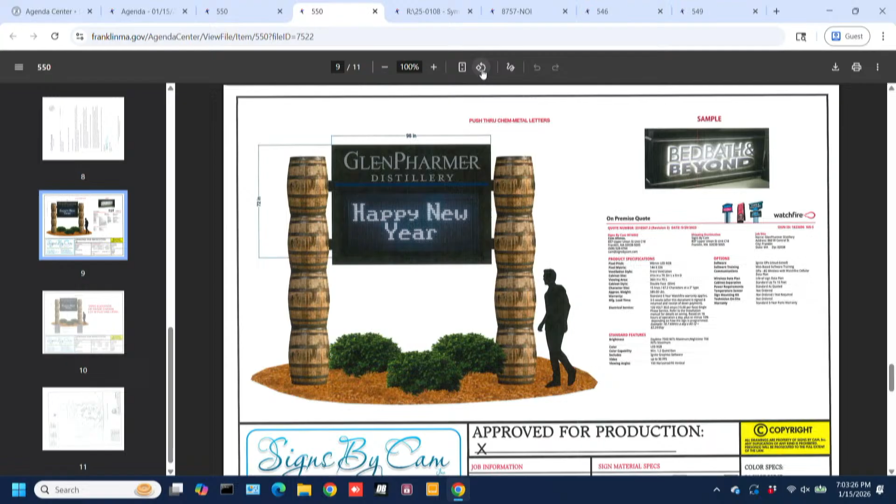Well, that's impressive. So basically, we're using 8 of our whiskey barrels as signposts. There's actually steel behind it. So the idea is, what we'd be disturbing would be digging footings. The footings would be dug so that the posts, which are inside the barrels, would be embedded in concrete. And ultimately you can see the steel that comes out and attaches to the frame in the center of the sign.

So you're not moving it any closer to the brook, just up the road relatively speaking? It might be slightly - the angle of the brook is such that... I don't know that it's exactly the same distance, but it's probably comparable based on the angle. Digging a round hole, put some sonotube in it, putting the thing in and filling it full of concrete. Correct. Yep, okay, pretty straightforward.

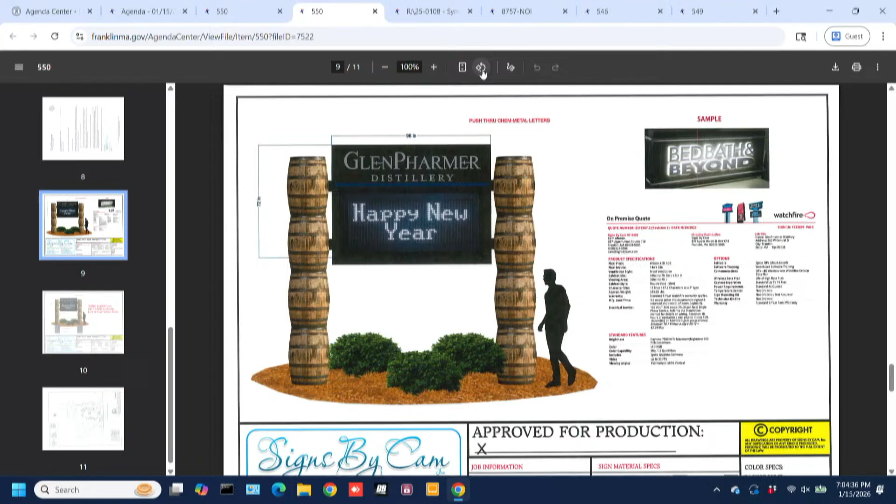Breeka Li, any comments? Only that this is very de minimis in nature, so I would recommend an approval. Agreed. Any questions or comments from the studio audience?

All right, with that, Richard, you want to give us a motion to approve the MBZA for 860 West Central Street? Love to. I give you a motion to approve the MBZA for 860 West Central Street. Second. All right, vote to approve. Approve. Approve. Approve.

Thanks for coming and taking the time to explain it to us, we really appreciate it. That didn't hurt too much. No, it didn't. It's been a process. Thank you so much. Yeah, no worries.

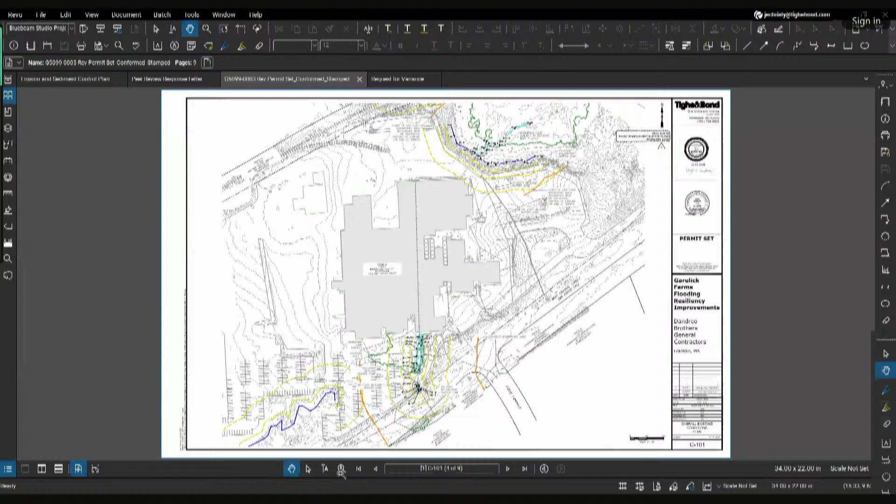Louis, any comments on the PLS? So the information you obtained was from the referenced drawings or surveys. I'm seeing here, let's see, the most recent one was the resource areas—well, that was done by you guys. But then there was a utility. I'm sorry, what are you looking at? The G002 general notes, the base plan notes. So really, you took the information from the utility that did the underground surveying, and that included the most up-to-date survey information on this plan?

So this list is all the pieces and parts we've used. Garlick Farms had their own base plan. We did the topography—Tighe and Bond flew the topography. Outside of the resource area delineation, we did have WSP, the surveyor, do a survey of the drainage system, that's the third bullet. After that, we did ground penetrating radar to find other utilities in the area, the depths and things like that. And then we referenced the drainage infrastructure project in West Central Street that was done for DOT, to make sure some of our property line information was correct, so we had their layout and property line information shown accurately on the drawings.

Nothing's changed since this information was generated that you guys used. Not to my knowledge, no. Okay. No.

Yeah, I think typically when we work on the application itself, it does request the PLS to have that information presented to us. I know there's some cases, especially as an engineer, you can do that. You just reference other pieces of information as long as it hasn't changed, or you're working in conjunction with a surveyor. There's those types of situations.

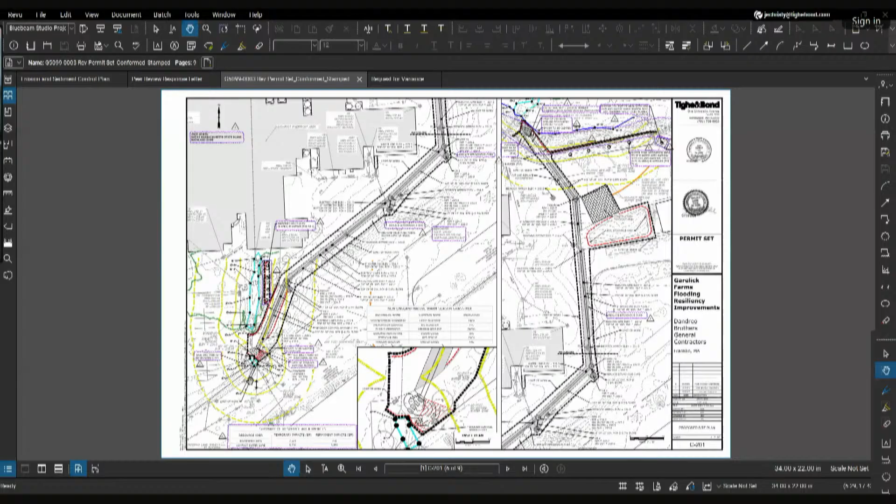And I know there's not a lot of information in here already, but it's... this is a very developed site. They've been here for years. They know where everything is. Yeah, we're putting in a drain line to go and suggest, and they've detailed exactly where, 1, 2, 3, 4, 5, 6, 7 pieces of information where they got the layout. What are we going to achieve by doing something else? I don't understand. Yeah, I think they know exactly where it's going to go and what they're going to be crossing. No, I don't doubt that, so.

No, just looking at the plan, like the references now, it seems like you have a lot of them in there. Right.

Louis, out of curiosity, does it make a difference to you on the precedent that, in this case, we are not actually building anything? Right, so they're not putting up new buildings, they're not putting up new structures. Right, yeah. And in that case, I would agree that I think the PLS is probably far more important, because you need to know exactly where it is on the property. Yeah, but in this case, they're digging a trench. I think you're right. Yeah. And I don't know if that alleviates some of your concern over the precedent.

No, that's definitely a good comment, for sure. I think, just given that there's information in there and they're referencing it, and nothing's changed since the last information, so is that my understanding? Is it, Gene? That's my understanding as well. Okay, all right. Okay.

Any other thoughts on the variance for the PLS? You feel comfortable, you got more knowledge than... It's interesting because we'll use it oftentimes, at least in some of the projects, especially when it's more complex, we'll use a survey. Like I said, sometimes if we have enough information, we can put it down. But basically we're certifying that this is.

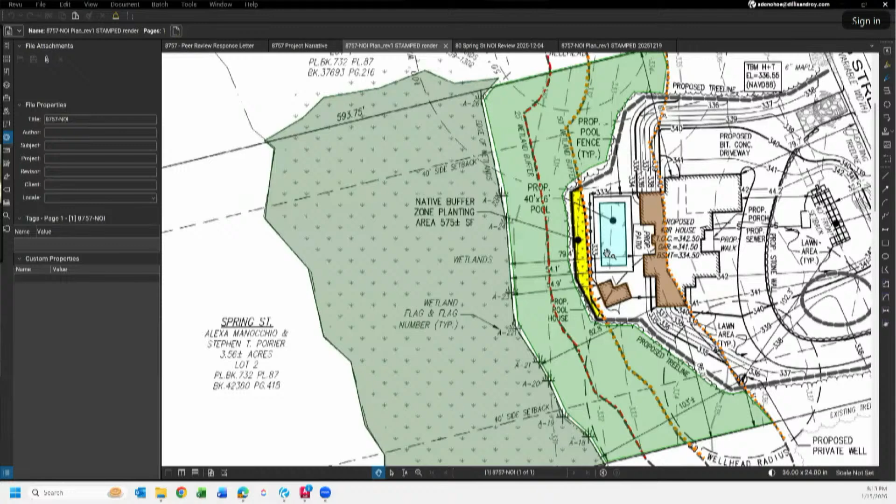Oh, this is nice. So, this is actually the fence right here. Oh, yeah, and the highlighted area is the restoration area. We had discussed, and I believe that some of the commission was sympathetic - well, we certainly did move the location of the structures. The applicant has a desire not to have a tree hard against their pool. So I feel this was a compromise in that we have a fence and then there's a low-lying native shrub area adjacent to the pool in this manner.

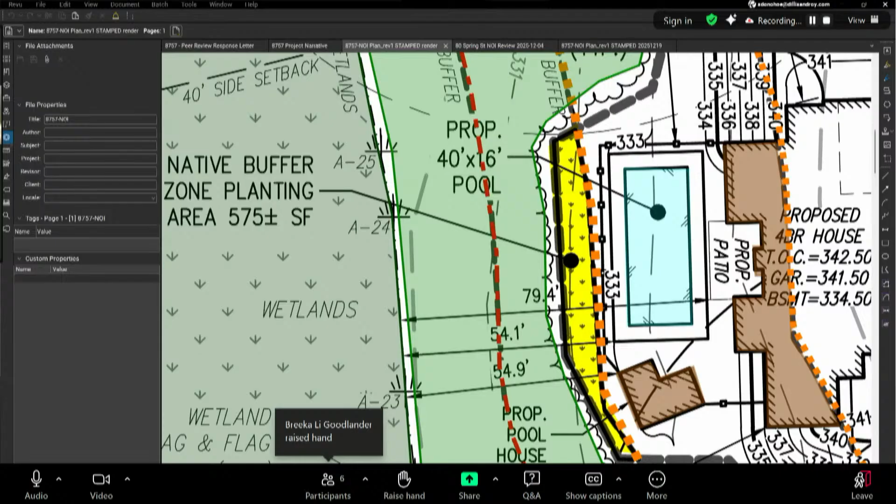Okay, all right, good. Well, your color makes it a lot easier to see, so thank you. That's what we were looking for. All right, that was the one pointer question I had. I don't know if anybody else had anything. All right, so we'll get confirmation back from Beta in a response on your comments, but again, looks fairly administrative.

And Breeka Li, I see you've got your hand up. Yeah, I was just going to ask if the plan could be amended because the fence dashing actually extends into the 50-foot buffer zone. So I feel better knowing that the fence is supposed to go along the line of the actual boundary of the 50-foot buffer zone, but the gray hashing goes into the 50. So I think that's the point of confusion. So we would need an updated plan.

I think maybe we'll color code that for you because the intent is to be exactly as you're requesting. That's fine. So I've zoomed in here and the 50-foot buffer line is a bold line at the rear of the site, and the fence then is entirely outside of it. Okay. And we would certainly be accepting of a condition that the fence itself needs to be outside of the 50-foot buffer zone.

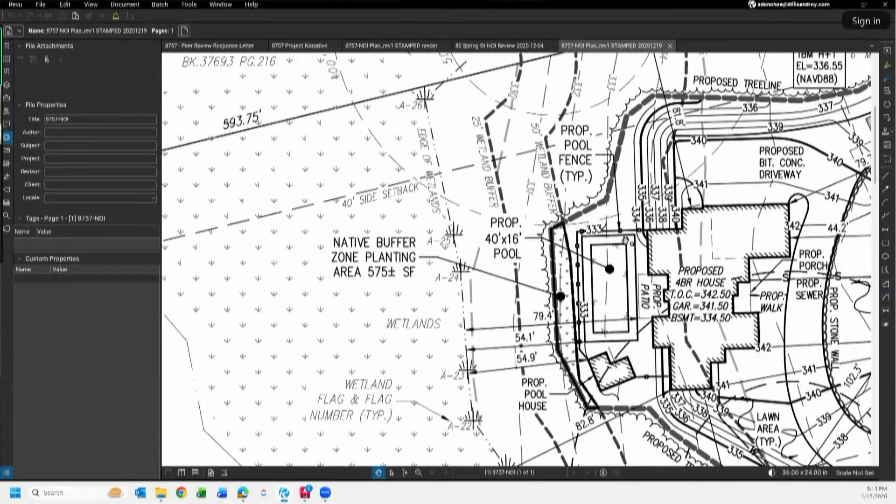Oh, I'm sorry, I was looking at the proposed tree line. I was thinking that at the top proposed pool fence, it pointed right to that gray bolded hashing. It didn't come down. Yeah, I'm set now. Thank you so much, Seth. It's no problem. Good. I was confused too.

Yeah, that's why I was saying, the color, I think we all had this - the line weight, it's blending together. Yeah, so that's why the color was good, but we could fix that with a condition, so okay. I don't know, Breeka Li, if, I mean, everything else looked pretty administrative and mopped up, so. Correct.

I don't think there's anything else we need to review. Nope. At the request of the commission, I can draft conditions then for the next meeting. That'd be great, okay, thank you.

Does that work for you, Seth? I would have no objections to that. I'll be happy to attend your next meeting. That assumes that Beta will have time to review prior to that. And if you would like my participation in any of the conditions, I'd be happy to do so. I also understand that many of those may be requirements that you enact on this.

So we'll present them to you on the 29th, and you certainly have the opportunity to discuss input, and the goal would be to finalize them then, for sure. That sounds great. Any other comments, questions? Anybody in the audience or on Zoom?

With that, Louis, we'll give you an opportunity to give us a continuation for the NOI for 80 Spring Street to January 29th at 7:04. I'll give you a motion to continue the hearing for 80 Spring Street for January 29th at 7:04 PM.

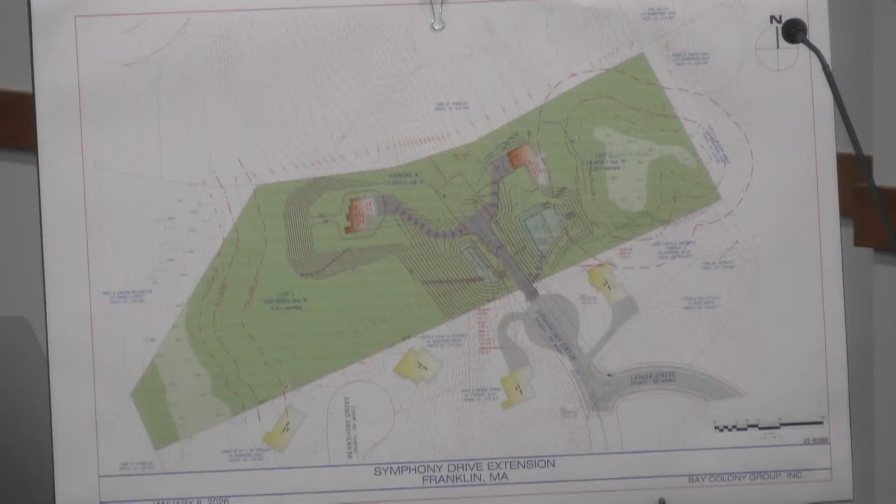So this property is located at the end of Symphony Drive, beyond the existing cul-de-sac. The property is currently undeveloped and consists of a wooded area. You can see, looking at this parcel, that it's located on a hillside, and it slopes west to east with approximately 90-foot elevation change, so it's a pretty significant slope.

There are 2 isolated wetlands located on this property. One in the western portion of the property, located at the top of the hill, depicted in light green, and then one located on the eastern side of the property at the bottom of the hill, again depicted in light green. So these are isolated wetlands, so we're here just under the local bylaw, not covered in the Wetlands Protection Act. So that wetland was reviewed and flagged by the Park Corporation, and we went out and located the wetland flags in an on-the-ground survey.

So we're proposing the construction of a single-family home along with the associated driveway, utilities, and yard area. A portion of the home, the backyard, and the drainage basin will be located within the 100-foot buffer zone, which I've depicted as that red dashed line. The home will be approximately 89 feet from the wetlands at its closest point. The basin will be approximately 81 feet from the wetlands at its closest point.

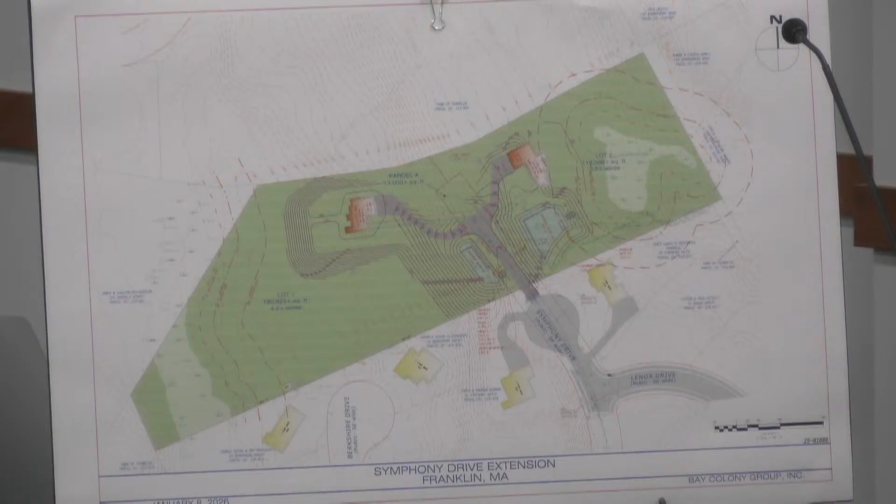Quick heads up for you, I was going to ask this - in your narrative of the NOI, it says the home will be 51 feet from the wetland. Yeah, I caught that earlier, so I went and double-checked all my numbers, and I know these ones are correct. All right, because I'm looking at the plans, and I'm like, that doesn't look like... Yeah, so the house that I showed depicted on the plan is 89 feet from the wetland. Oh okay, thank you, that makes sense.

No problem. And then again, the basin's 81 feet, I double-checked that one, and then the limited clearing is taking place 31 feet from the wetlands at its closest point. So approximately 14,560 square feet of buffer zone will be altered due to this project, with about 2,638 square feet of that area taking place within the 50-foot buffer zone.

We're not proposing any structures or impervious area within that 50-foot buffer zone, and we're not proposing any work within the 25-foot no disturb area. Regarding the grade of the existing slope, I don't have it offhand, but it goes 90 feet from the top of the site all the way down to the bottom. I don't have the dimensions right here, but I can provide them.

So it slopes from the middle to the east, going from about 292 down to 266, roughly 30 feet. The ridge of the slope is up near Berkshire Drive, and it slopes all the way down to the wetland at the bottom, continuing to slope from there.